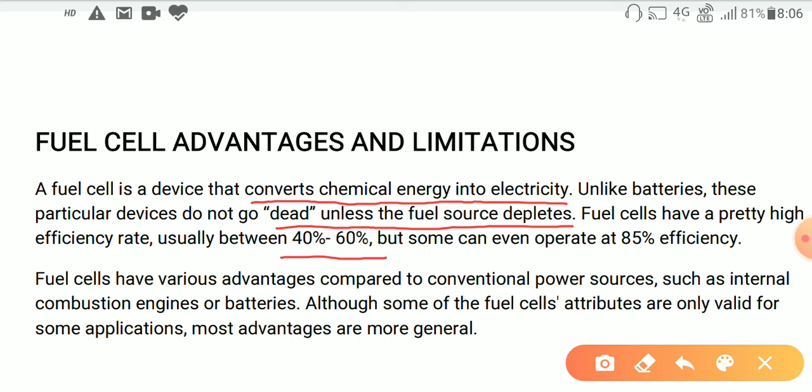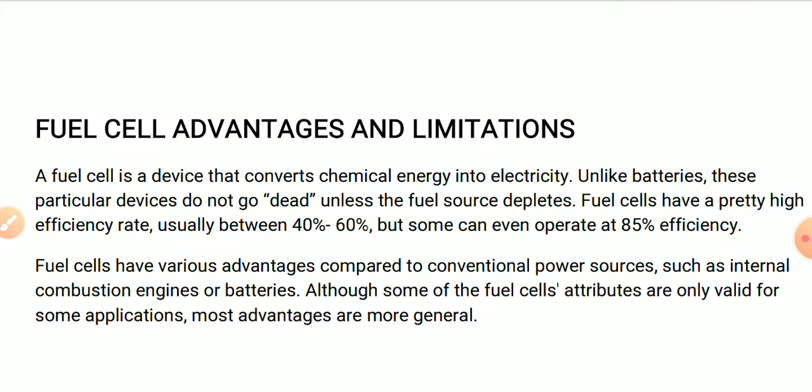Fuel cells have various advantages compared to conventional power sources such as internal combustion engines or batteries. Although some fuel cell attributes are only valid for some applications, most advantages are more general. So we are interested to talk about the applications of fuel cells.

For portable power, this is a most utilizable requirement. Portable fuel cells have the potential to replace battery packs and generators for use in electronics such as laptops and cell phones. The use lifetime of personal devices would be greatly improved after replacing the battery, due to the fact that fuel cells have a much higher power density.

Another advantage of the portable fuel cell is the possibility to refuel immediately rather than the inconvenience of waiting for charging. The fuel cell also does not short or overload, whereas a battery can malfunction and is limited to a certain number of years, after which its power capability degrades. So this is important for portable power, for that particular kind of reason.

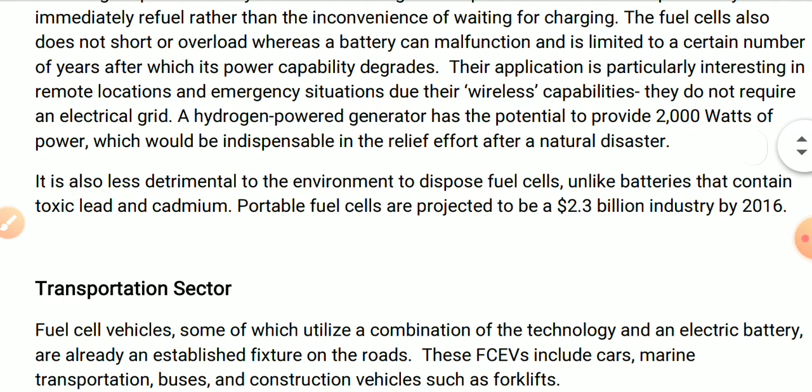Now we concentrate on another kind of application, that is the transport sector. Fuel cell vehicles, some of which utilize a combination of technology and electric battery, are already an established fixture on the road. These FCEVs include cars, marine transport, buses, and construction vehicles such as forklifts, where they are most advantageous.

Automobiles are a significant contributor to harmful carbon monoxide and greenhouse gas pollution in the United States. Highway vehicles are blamed for 75% of petroleum consumption, over 60% of CO production, and releasing 20% of greenhouse gas. So this is a huge amount. This can be avoided by application of fuel cells in the transportation sector.

Lack of fuel station availability is currently limiting the commercialization of cars. This links to the Alternative Fuel Data Center that provides information as to where one can locate a fuel station. This is not an issue with municipal buses, where the route can revolve around the hydrogen service station. Many European cities have already implemented zero emission public fuel cell buses.

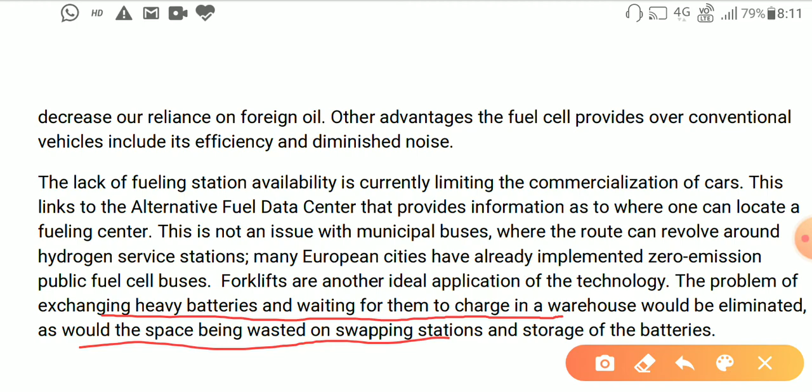Forklifts are another ideal application of the technology. The problem of exchanging heavy batteries and waiting for them to charge in a warehouse would be eliminated, as would space being wasted on swapping stations and storage of the batteries. So these are the limitations for this.

Stationary power. Fuel cells are becoming more prominent in the commercial and residential sector to provide power either alone or as part of an integrated system. Fuel cells are able to deliver very efficient power while raising a company's environmentally friendly profile. So if any industry or company wants to be environmentally friendly, they try to use fuel cells and establish them there.

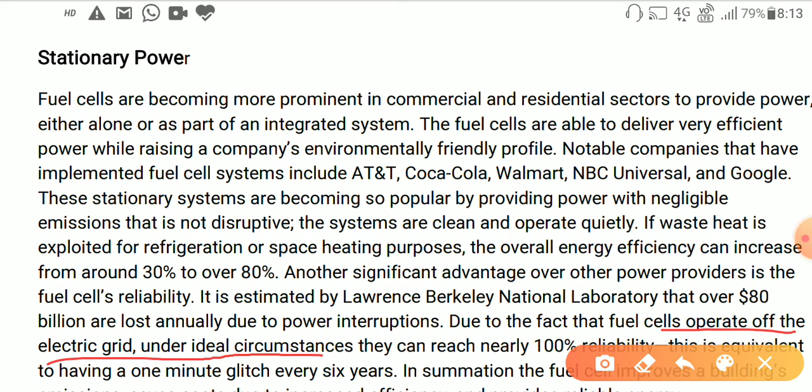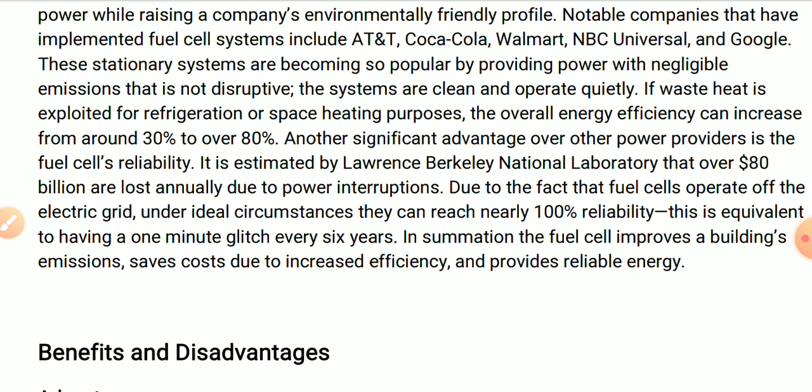Due to the fact that fuel cells operate off the electric grid, under ideal circumstances they can reach nearly 100% reliability. This is equivalent to having a one minute glitch every 6 years. That means this is most advantageous for a company using this kind of power source. In summation, fuel cells improve a building's emissions, save cost due to increased efficiency and provide reliable energy.

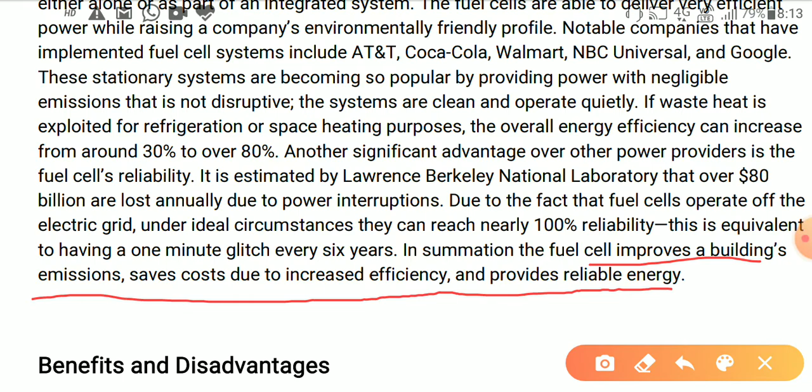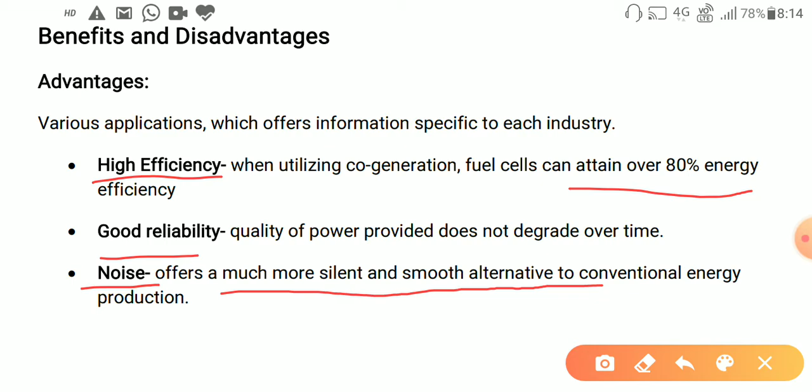Now we talk about a short view of the advantages. High efficiency, attaining over 80% energy efficiency; good reliability; noise is much less, offers a much more silent and smooth alternative to conventional energy production, so this is a noise free energy generator; environmental benefits, generating reduced CO2, that is carbon dioxide, and harmful pollutant emissions.

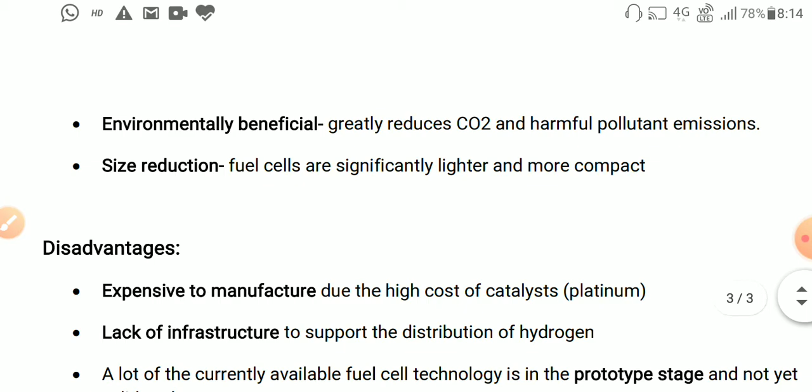Size reduction: fuel cells are significantly lighter and more compact. But some limitations or disadvantages are present. They are expensive to manufacture. This is the most highlighted point, due to the high cost of the catalyst. Whatever catalyst you choose there is very costly. In most cases platinum is used as the catalyst, and this is highly costly.

Lack of infrastructure to support the distribution of hydrogen. That means if you make a car using the fuel cell, but hydrogen support is not present, that is, if the distribution center needed to supply hydrogen as a fuel is not present, it will not be effective from a design point of view. So the lack of infrastructure is also an important limitation for the fuel cell.

A lot of available fuel cell technology is in the prototype stage and not yet validated. So for various reasons, the prototype stage is only applicable in the present situation, and due to the technology and the lack of various important things, fuel cell application is also reduced from an application point of view. So this is the limitation. The prototype stage is still present now.

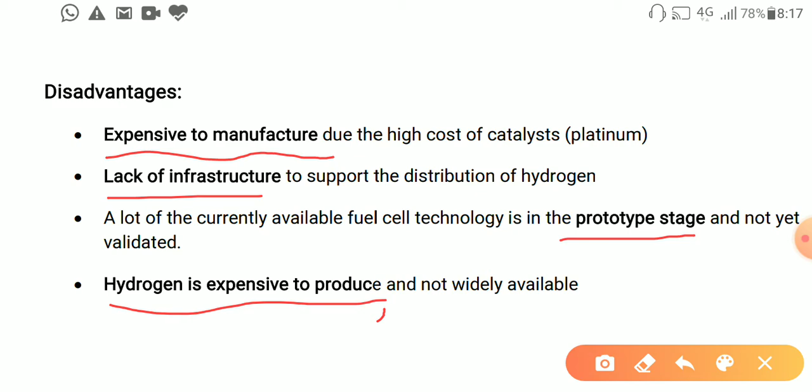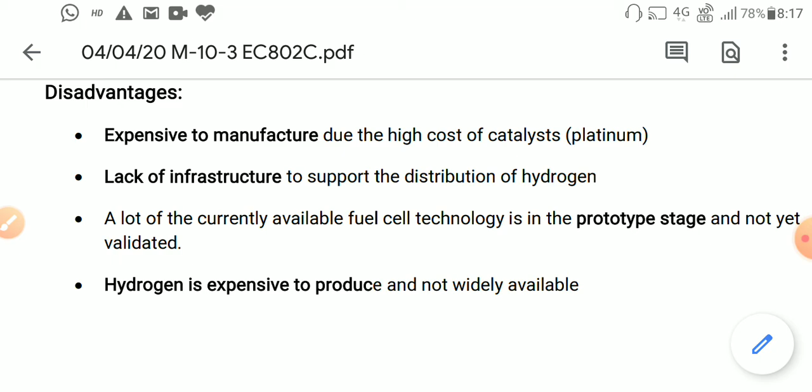Hydrogen is expensive to produce. Till now, hydrogen is expensive, and we already know that for the fuel cell, the fuels used are hydrogen and oxygen, so you have to supply these two to the cell. So in this case, because hydrogen is expensive to produce and not widely available, this is one of the important limitations.

So I think everyone can learn about the fuel cell and also know what the limitations and the advantages are.